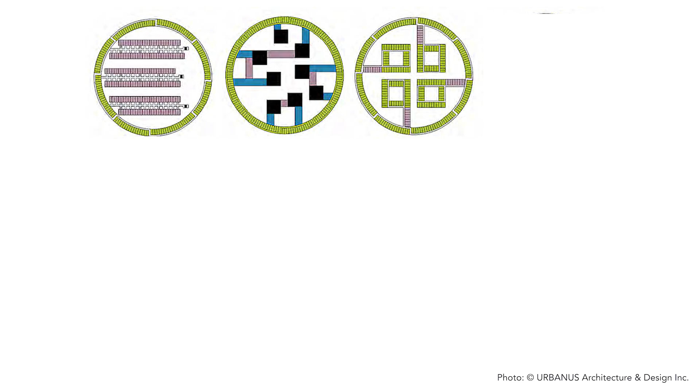The architects developed several studies to incorporate the program of requirements commissioned by the client in the shape and formal characteristics of the traditional Tulous. Furthermore, it was expected that the future residents would come from outside, mostly from rural parts of the province of the country. Hence, the architects did not have the opportunity to organize participatory design decision meetings with future residents, as these were not known at the time of the design.

This suggests that the project's relation with the local context was more determined by the physical and infrastructural features of the site rather than its socio-cultural characteristics. In other words, to what extent is the Tulou Collective Housing Project an adequate answer to meet the socio-cultural requirements of its residents and the context in which it is inserted? To answer this question, it is important to make sense of the process of rapid urbanization that characterizes many cities in the world, and particularly in China.

At the time of the project, in 2006, Guangzhou was the third largest city in China and the largest in the southern part of the country, with a population of approximately 10 million inhabitants according to official records. In just 10 years, the city experienced a growth of 4 million inhabitants, which is a remarkable figure. In places undergoing a process of rapid urbanization such as this, one of the major challenges is to avoid the so-called cookie-cutter approach, in which housing is developed in similar forms and shapes. In this respect, the Tulou Collective Housing Project introduces a clear break with some approaches to the design of affordable housing based on endless repetition of similar blocks.

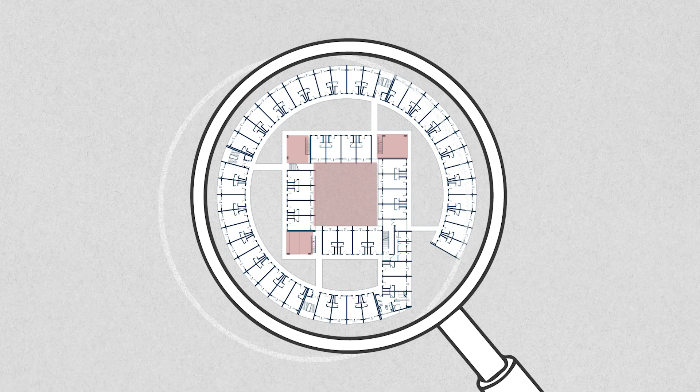Inspired by the vernacular Fujian Tulous, Urbanus developed an original variant to the perimeter housing block, creating an innovative solution where the central courtyard of the block creates an engaging communal space, activated by a small restaurant and shops. Through the configuration of the square block within the circular block, the architects created spaces that promote the social interaction of the residents, mitigating the potential alienation felt by many rural migrants that move to the big metropolises and live without any social network to support their integration in the city life.

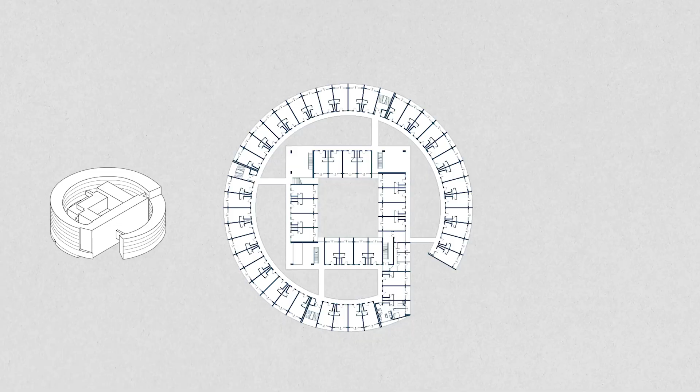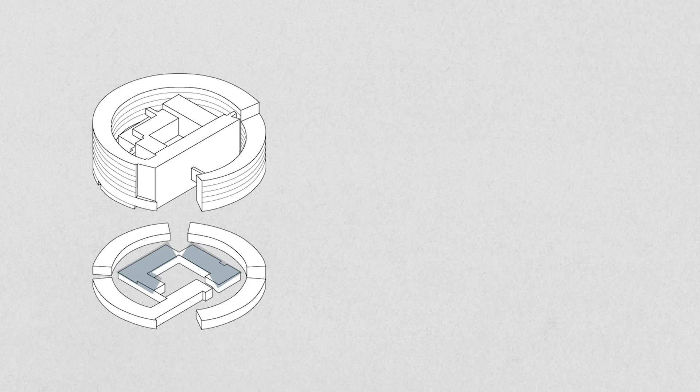If we move from the scale of the whole block to the smaller scale of the dwelling unit, we can see that the architects applied only limited variations of dwelling units, but they included some flexibility. The most predominant type is the 40 square meter apartment that can be organized as a 2-bedroom family apartment or a shared dormitory space for 5 residents. The project also includes a hotel or inn on the ground floor of the square block, offering 18 rooms for temporary use. On the top floor of the circular block, the sloped roof increases the available ceiling height, offering the possibility of creating a mezzanine, which expands the usable area of the apartments to 60 square meters.

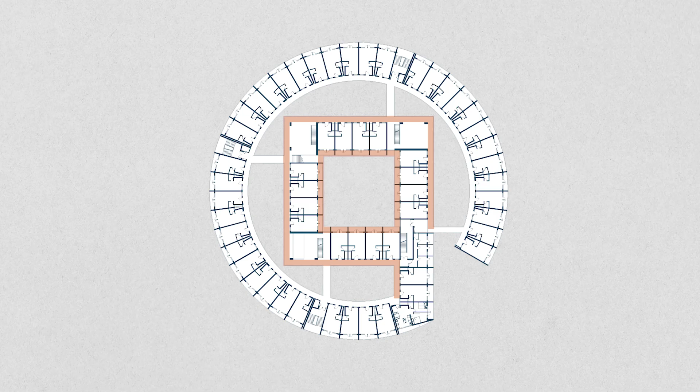The introvert configuration of the block is also reflected in the layout of the dwelling units. In the circular block, each unit has a balcony facing the surrounding public space, and the access is made from a distribution gallery oriented to the courtyard of the block. In the inner square block, the private balconies face the patio, while the circulation faces the courtyard, just like the ones from the circular block. This creates an interesting balance between privacy that each resident can have in their unit and private balcony, and the sense of social control created by the structure of collective circulation facing the courtyard.

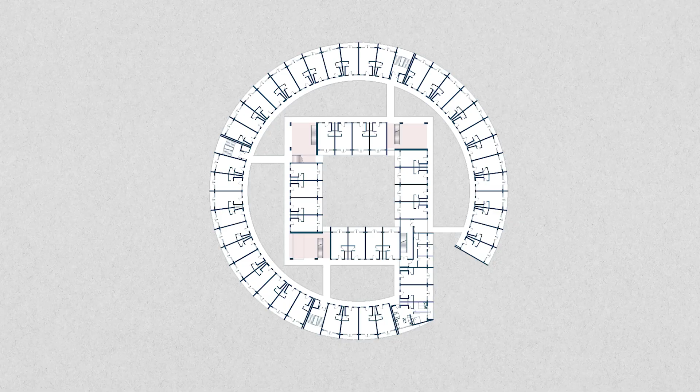In addition to the shared courtyard created between the circular block and the square block, there are also other spaces for social interaction at the scale of smaller social groups. In the corners of the square block, there are open spaces where small groups can gather and socialize. These spaces are connected to the circular block by bridges that stimulate the connection between the distinct parts of the residential block. Additionally, the project includes other spaces for social exchange and community engagement, such as amenities located in the basement, shops and a restaurant on the ground floor, and a roof garden on top of the square block. These spaces contribute to stimulate a more inclusive living environment, avoiding the drawbacks of a monotonous repetition of similar blocks without options for social interaction that are often seen in most of the affordable housing projects developed for regions undergoing a process of rapid urbanization.

Considering that the Tulou Collective Housing is a social housing project built by a private developer, there are also financial considerations that played a significant role, such as rental costs. The size of the dwelling units and the density of the project was instrumental to keep the rent costs low and accessible for low-income families. However, interviews with residents revealed that there are also people with higher income living in the complex. This diversity of socio-economic backgrounds is also an important feature to promote social mix and avoiding stigmatization and social segregation in residential areas.

As we can conclude from the observations made in this video, the designers of Guangzhou's Tulou Collective Housing Project created an innovative housing type with qualities that mitigate the detrimental consequences of rapid urbanization and rapid demographic growth. They have developed an imagination of a housing project that could be replicated in other locations, suggesting how it could be included in the toolbox of designers, urban planners, and policymakers to create living environments that promote social sustainability and a more inclusive coexistence of different social groups and lifestyles.